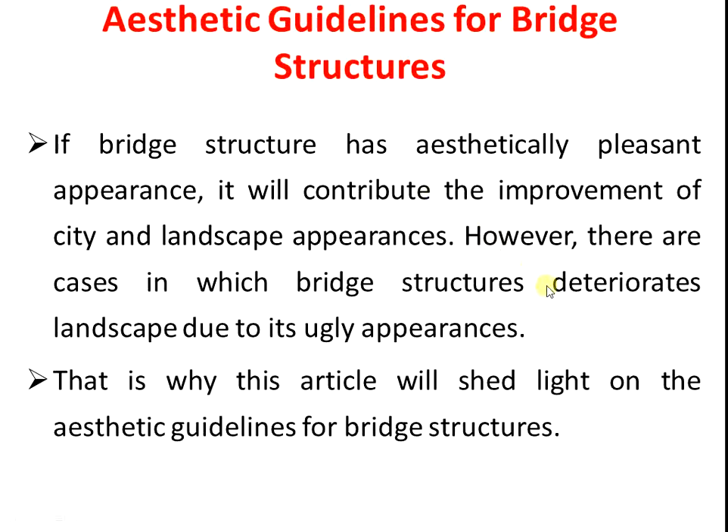Various bridges present in the city deteriorate the landscape due to ugly appearances. Because of that, we require aesthetic guidelines for bridge structures. There are various aesthetics in bridge structures. First we have to consider these points.

The first is clear structural system, second good proportions, good order, next integration into environment, next choice of material, next coloring, next space above the bridge, next recognizable flow of force, next simplicity, and last one is lighting. These are the important points at the time of designing and constructing the aesthetics of the bridge. We will see them one by one in detail.

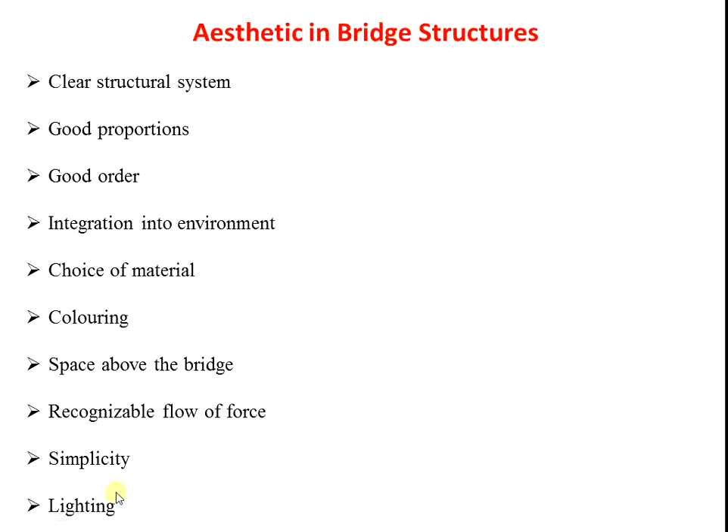The first aesthetic is the clear structural system. It is necessary to make sure that the load bearing elements of bridge structures are reduced to as minimum as possible. At the time of designing or constructing the bridge, we have to ensure that the load bearing elements, that is the piers, are reduced as much as possible. In this way, not only does it look stable but also reliable.

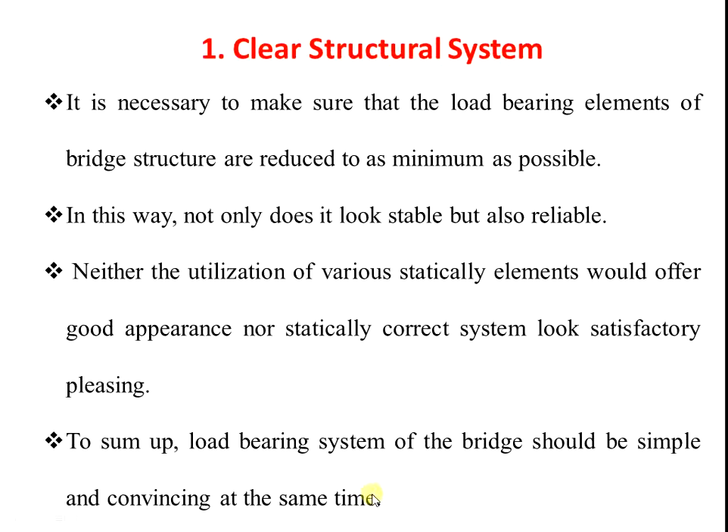Neither the utilization of various static elements would offer good appearances nor would a statically correct system look satisfactorily pleasing. To sum up, the load bearing system of the bridge should be simple and convincing at the same time. At last, the load bearing system of the bridge should be simple looking and also convincing at the same time.

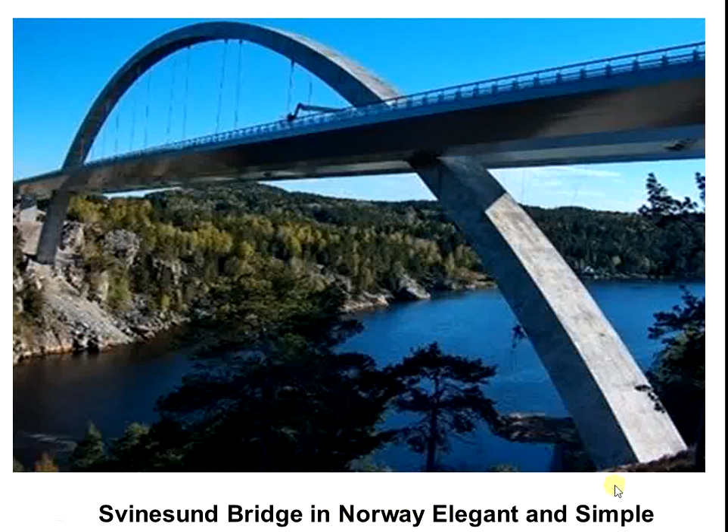Just like this picture, it looks simple and convincing. This is the image of the Svinesund Bridge in Norway, elegant and simple. Next, another image of this clear structural system. The third Caroni River Bridge in Venezuela looks simple and reliable. This is the aesthetic. It looks nice, with good appearance.

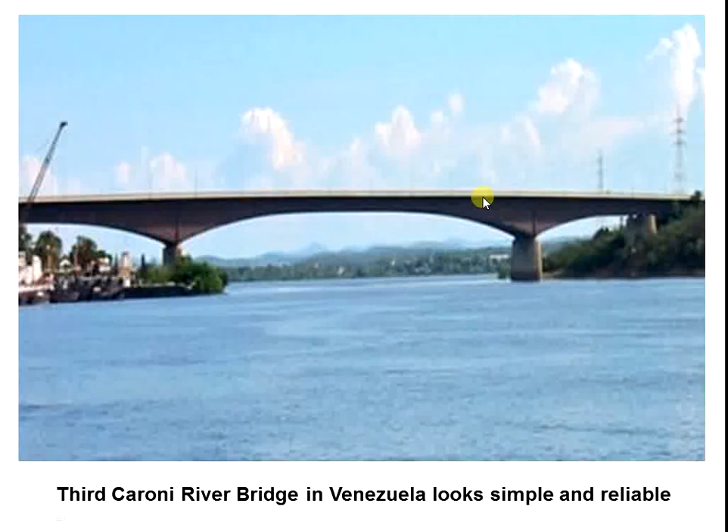The next point is good proportions. One of the elements of bridge structure that plays a significant role in its aesthetics is the presence of a balanced ratio between the structural members. Good proportion plays an important role in the aesthetic, that is, the presence of a balanced ratio between the structural members.

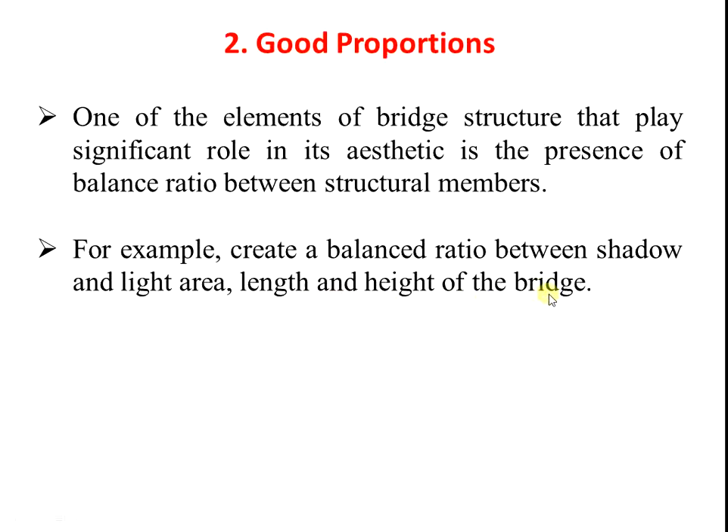For example, create a balanced ratio between shadow and light area, and length and height of the bridge. For example, you have to balance the bridge structural members between the shadow and light area, and also the length and height of the bridge structure. This is a good proportion image.

Third one is the good order. The edges and lines of the bridge, which create appearances of the structure, should be in satisfactory order. In the good order, the edges and lines of the bridge, which create the appearances of the structure, should be in a satisfactory order. This may be obtained by declining number and direction of structural elements. Added to that, repetition of structural members may provide good order.

Nonetheless, tedious repetition and routine should be prevented. In the good order, we have to prevent tedious repetition, and also routine should be prevented. That is the good order.

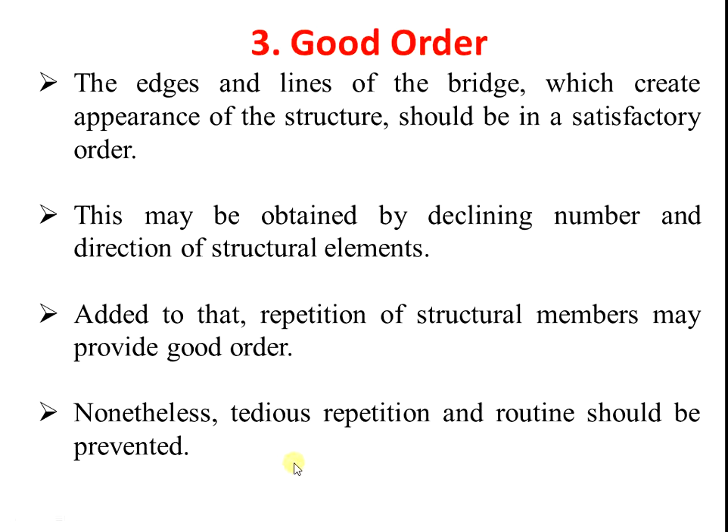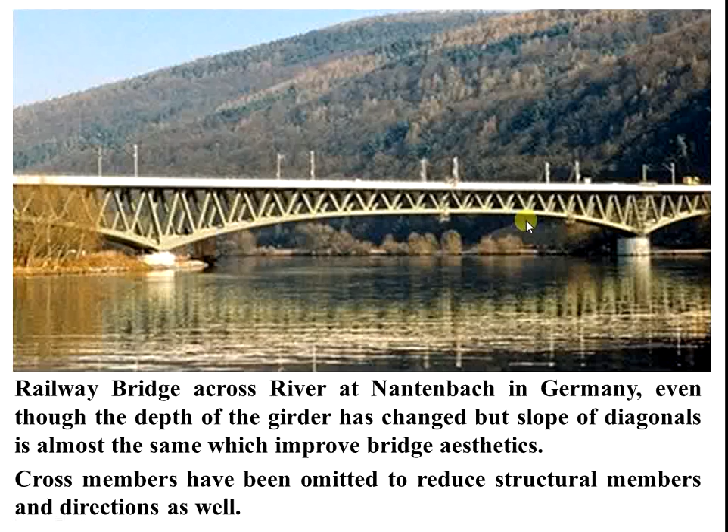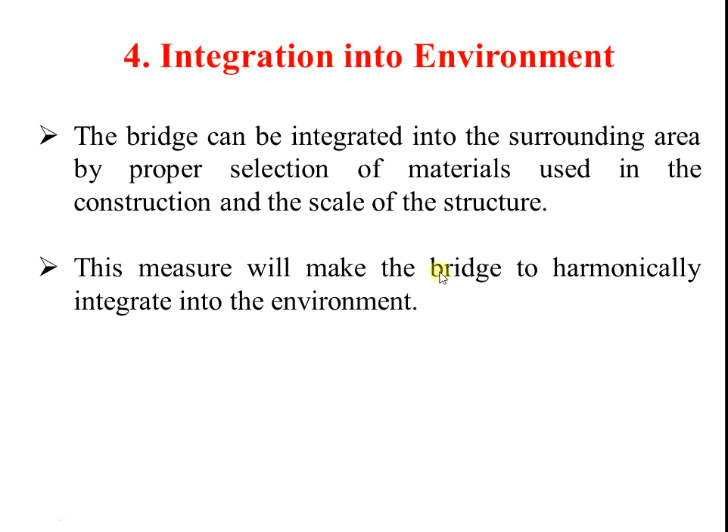Next is the fourth one, integration into environment. The bridge can be integrated into surrounding area by proper selection of materials used in the construction and the scale of the structure. Nowadays, it is very important to protect the environment by using the proper selection of the materials in the construction and the scale of the structures. These measures will make the bridge harmonically integrate into the environment.

In this picture, you can see the materials used in the bridge construction are like the surrounding buildings, and the color of the bridge railing is like the surrounding area as well. This is the proper environment.

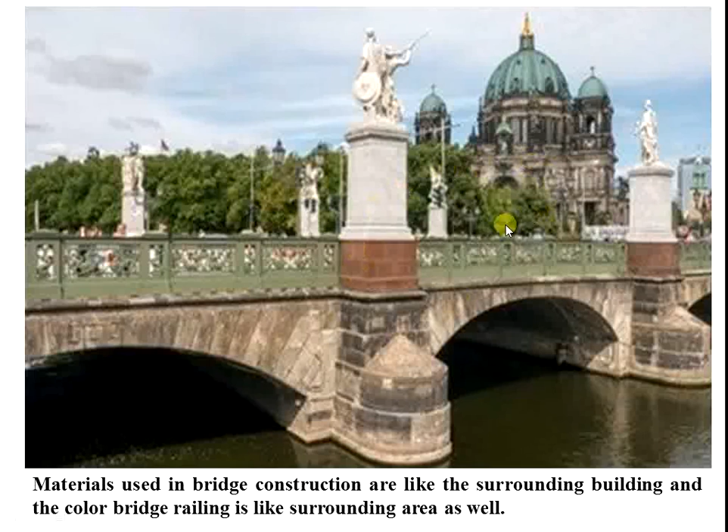Next, choice of the material. Fifth one is the choice of material. The suitable materials shall be selected in terms of load bearing capacity and appearances. We have to select the materials in terms of load bearing capacity and appearance purposes.

For example, concrete should be used in the strut construction, whereas steel is employed in the tie construction. For example, we have to use concrete in the strut construction, and also steel we have to use in the tie construction of the bridge.

Next, forms can be used to provide texture for large areas of concrete, but small areas are recommended to be left smooth. It is possible to apply natural stones for lining large areas of abutments and piers. For good aesthetic purpose or good appearance, we have to apply natural stone for the lining of the large areas of abutments and also piers.

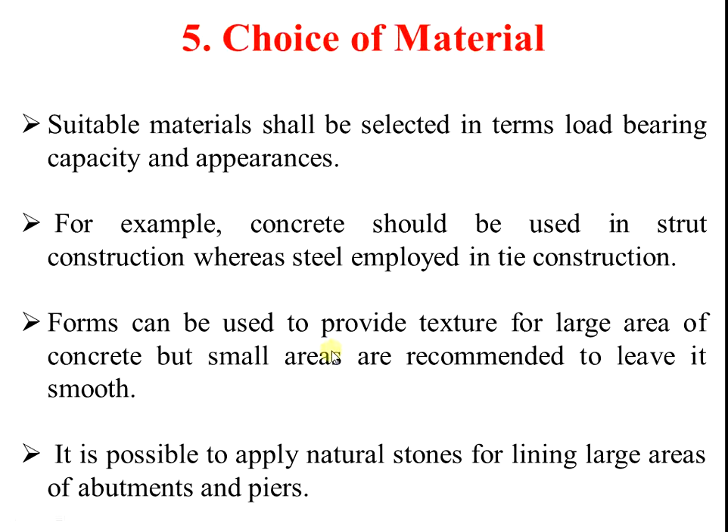Here we see that we have to select choices of the material. We use this natural stone for the pier, the massively elegant bridge construction from natural stone in Japan, which gets a good aesthetic view of the bridge.

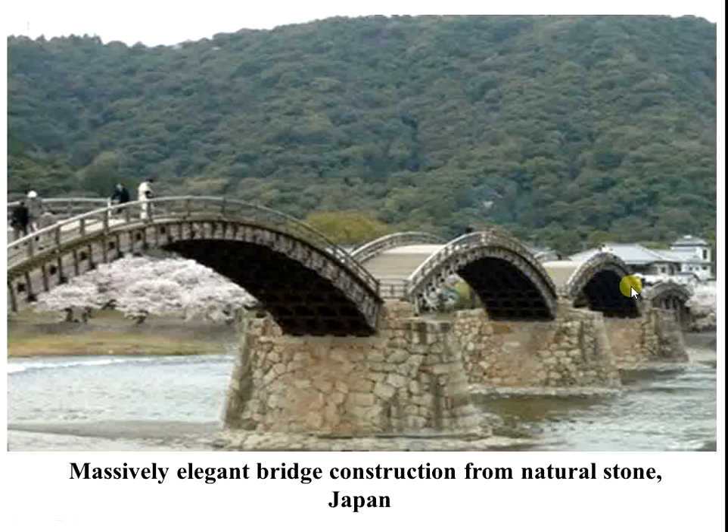Next is the coloring. Color plays a crucial role in the provision of visually pleasing appearances of bridge structures. Color plays the most important role in the aesthetic appearance of bridge structures. There are cases in which bridge structures, either constructed from steel or concrete, need to be colored to be integrated into their surrounding area and have attractive appearances.

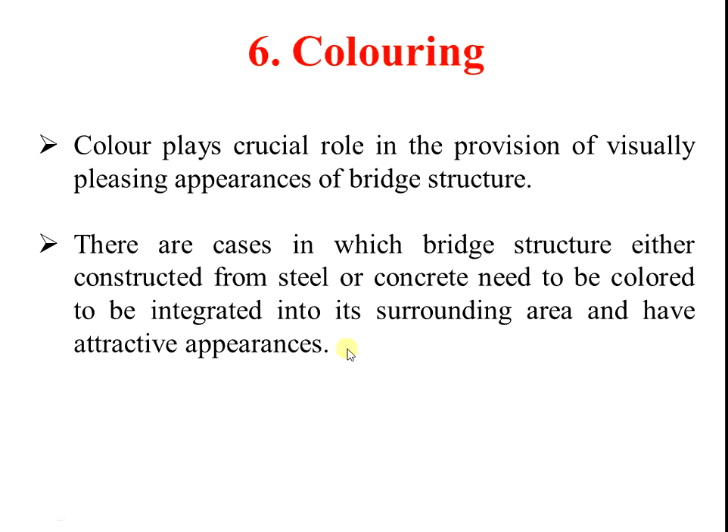Here it is seen that dark green for the piers and light green for the deck have been chosen to make the bridge like the surrounding trees. In this image, we see dark green color used for the piers and light green for the deck members, chosen for the surrounding trees. It gets attractive appearances.

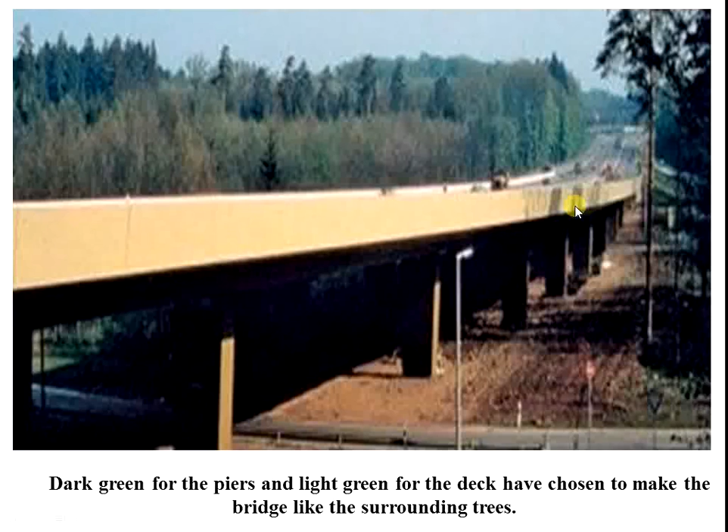Next one is the space above the bridge. The space above the bridge should give travelers a good and comfortable feeling. It might be a nice idea to show the start and the end of the bridge if there is no other structural element extended above the bridge. This type of aesthetic shows an attractive aesthetic appearance. It might be a nice idea to show the start and end of the bridge if there is no structural member or structural element extended above the bridge.

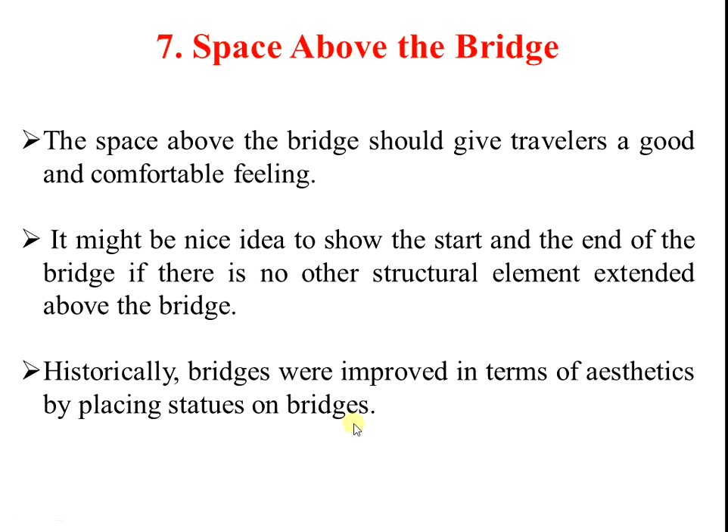Historically, bridges were improved in terms of aesthetics by placing statues on bridges. In old days, the bridges were improved for aesthetic purposes by placing various statues on the bridges. The cable creates a shape like a tent, which might give the travelers a feeling of safety. In this image, you can see the cables play an important role in the aesthetic appearance, which shape like a tent, which might give travelers the feeling of safety at the time of traveling.

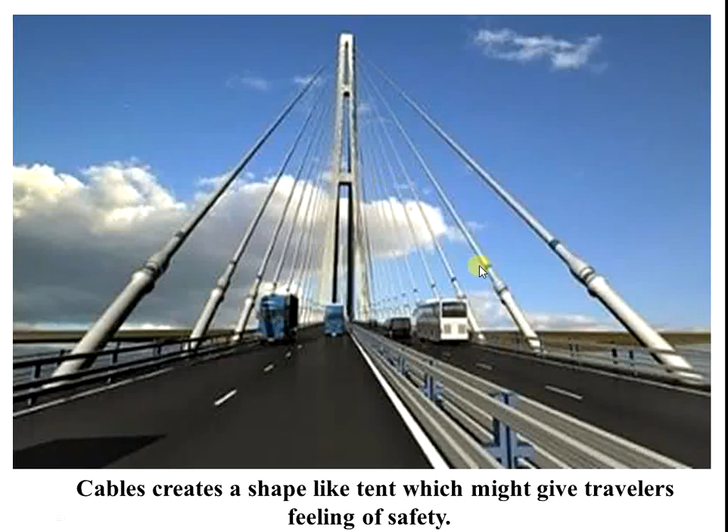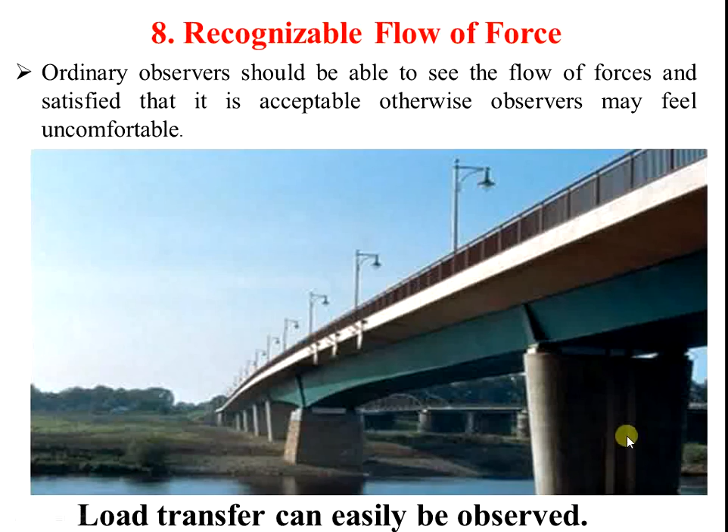Next is the recognizable flow of force. An ordinary observer should be able to see the flow of forces and be satisfied that it is acceptable, otherwise observers may feel uncomfortable. In this aesthetic, the ordinary observer should be able to see the flow of the forces and be satisfied it is acceptable, otherwise the observers may feel uncomfortable. In this picture, you can see the load transfer can be easily observed. In this image, you can see the load coming from the surface of the road, next the bearing of the bridges, and next the piers. It's easily visible.

That's why we prefer the simplicity of the bridge, because it helps in reducing the cost of the bridge construction. Also, we avoid a critical design of the bridge and also get an aesthetically pleasing view.

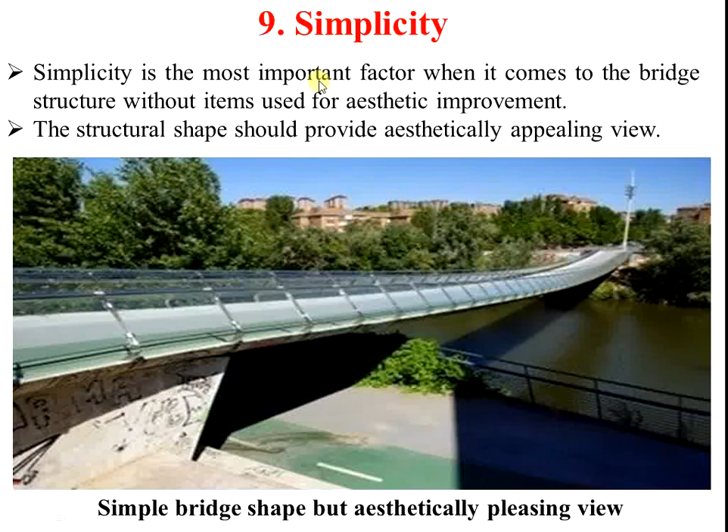The last point is bridge lighting. Bridge lighting is nowadays a common thing. It contributes to the city's appearance and also the landscape appearance. This type of bridge lighting we can see in Pune. Pune is known as the city of bridges in Maharashtra, because more bridges are constructed as compared to other cities. In Pune, various bridges have bridge lighting for a pleasant aesthetic view. For example, in Swargate, in Pimpri Chinchwad, various bridges also.